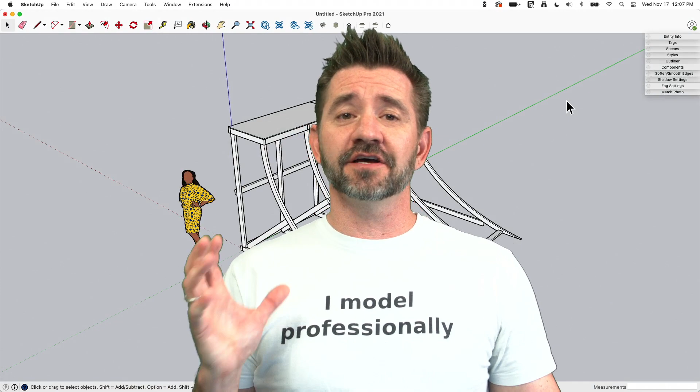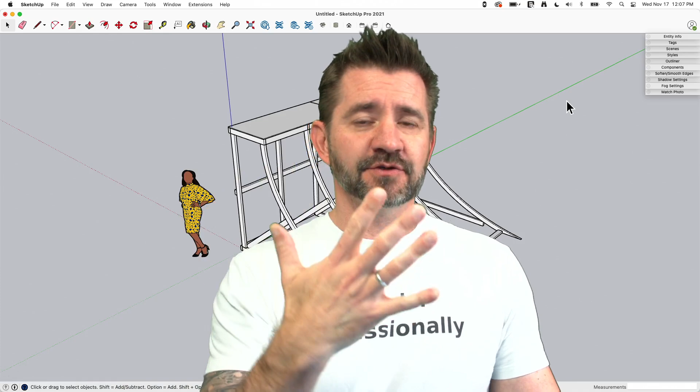Hey guys, it's Aaron, and today I want to talk about the process of drawing bent plywood. I know that sounds very specific, but the general idea is how to best go about the process of taking a sheet of something and drawing it so it wraps around or is bent on another shape. And that's what we're gonna take a look at.

Let's hop in. Okay, so I have here a quick mock-up. Maybe I'm working on a skate ramp, something like that.

Please don't spend time in the comments telling me about my ramp design skills. This is a quick example of the kind of thing that we could use this on. This is not necessarily the ideal design for a ramp. That's not what I want to talk about. Though I am talking about it, I apologize.

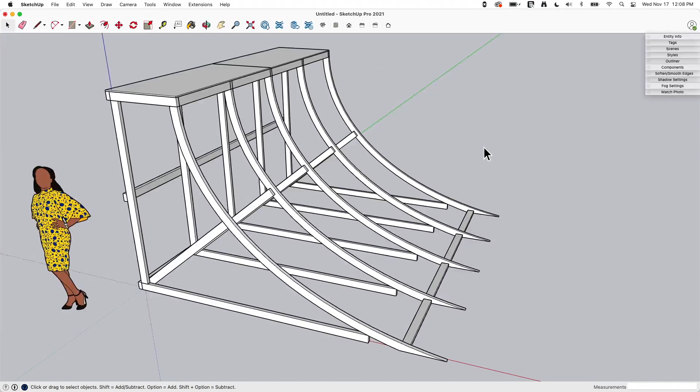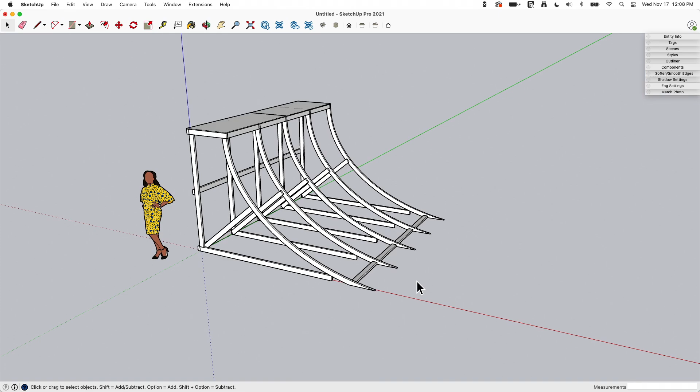Let's hop in and talk about it. Maybe I get to the point where I want to see what this looks like with my sheathing on here. And again, this is a ramp because it's a nice, tight little image that fits on the screen. This could be something like a barrel vault ceiling. This could be something like a rounded window box. Anytime you have a surface that's not straight that you want to drop sheathing onto, that's what we're talking about.

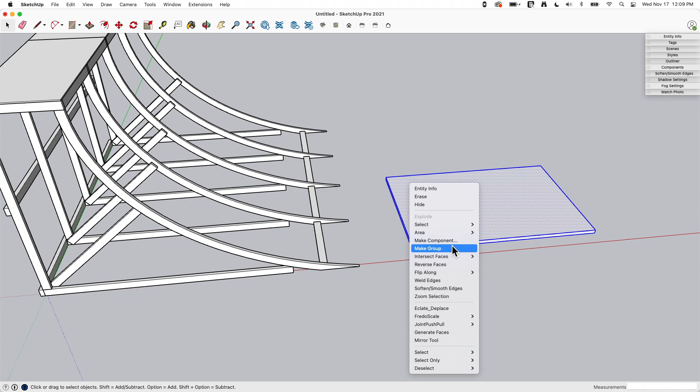So there's a couple things I've seen that I just want to mention. One is to come in and draw the shape. So draw your shape of your plywood, give it its thickness, grab all of that, make it a group, and then use something like the True Bend extension from ThomThom or Fredo Scale and use the bending tool. That is good if you're bending to an exact amount. If I know that I'm going to bend exactly, True Bend is great.

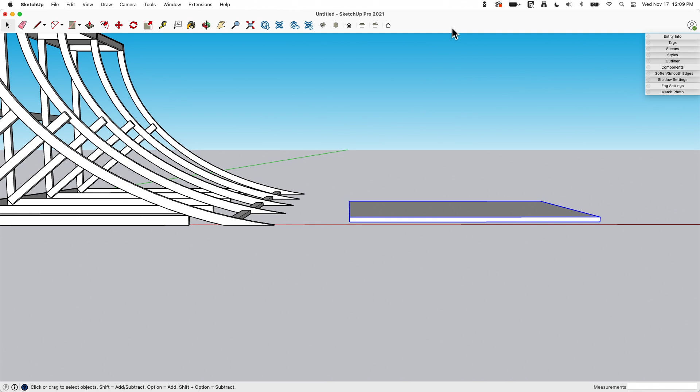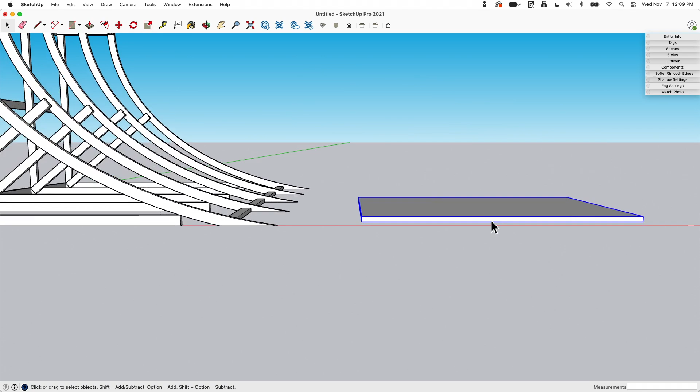It bends towards a full circle. So True Bend will take one end and wrap it all the way around so it meets the other end if I do 360 degrees. So if I'm doing half a circle with this, that's great. That works. Fredo Scale is nice because you can actually grab different segments along there and say I only bend this half of it. But with both of those, you are maybe not going to have an easy time bending to exact geometry. Fredo Scale, I know you could get a little bit more because you can do a little bit of snapping perhaps, but I want to come in and match this exact arc. This arc, by the way, is kind of odd because it's not actually a perfect arc.

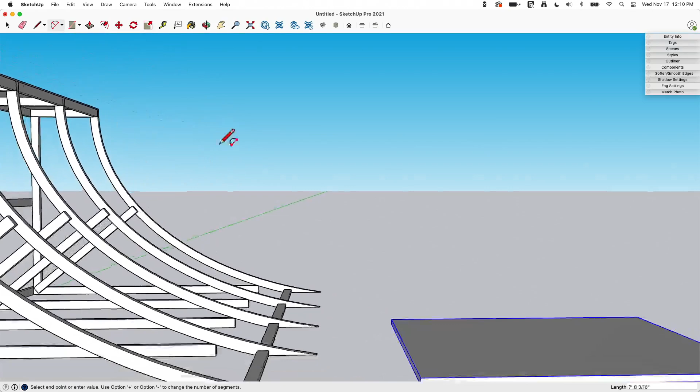If I grab my arc tool and I go from the top down to the bottom and I bring my arc down, there's no spot where this will actually meet correctly. See that? So this arc is actually deformed. This is not a perfect arc from one point to the other. So it makes it difficult to take existing material like this and then bend it to match.

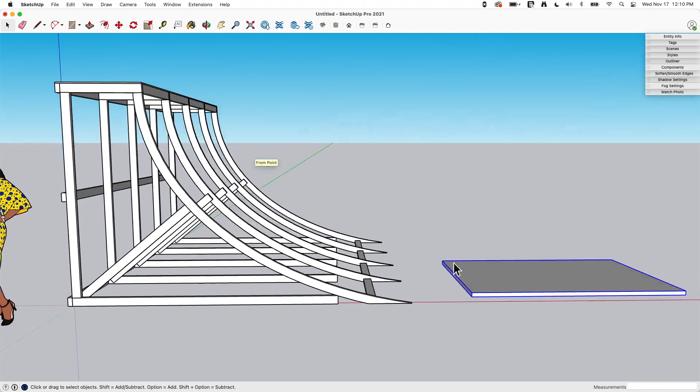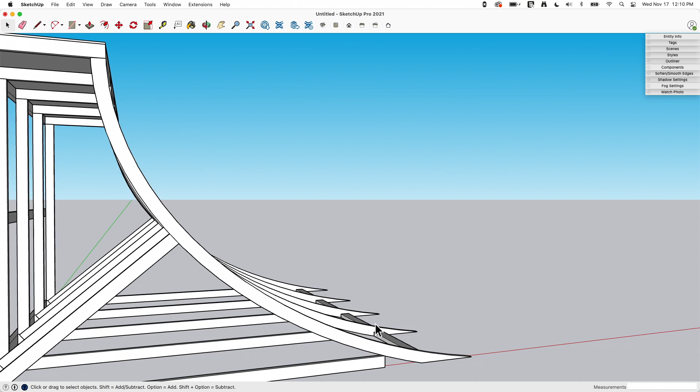What you have to do is think about it in a different direction. Specifically, I want to think about the end of my piece of plywood and then use push-pull to cover the space. So what that means is I want to grab this arc right here and draw the profile of the end of my plywood and then push it across the ramp here. So we are going to dismiss ideas like material sizes and that kind of thing. I just want to get one big piece of material to cover this whole thing and I want to see what that looks like. That's what we're going to do.

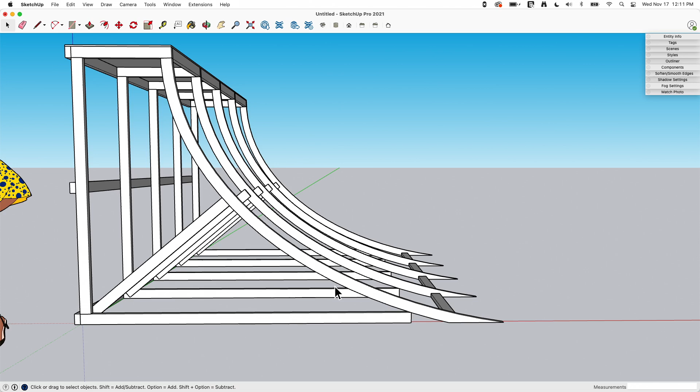So to do that, we need to grab this arc. Like I said, I can't just simply draw it. I could potentially come in with something like a Bezier tool and grab the two and then try, as best I can, to line it up. But regardless of how I do that, I'm probably not going to get the exact same increments in the exact same spot to get the perfect arc.

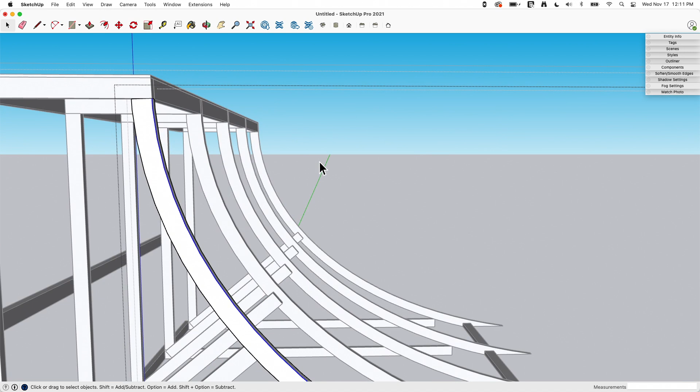Fortunately, what I can do is come into this geometry, so burrow in here, and grab this line right here. I can take that line, say Command C to copy it, and I'm going to come all the way back out and say Edit, Paste in Place. That's going to drop that arc right on top where it is already.

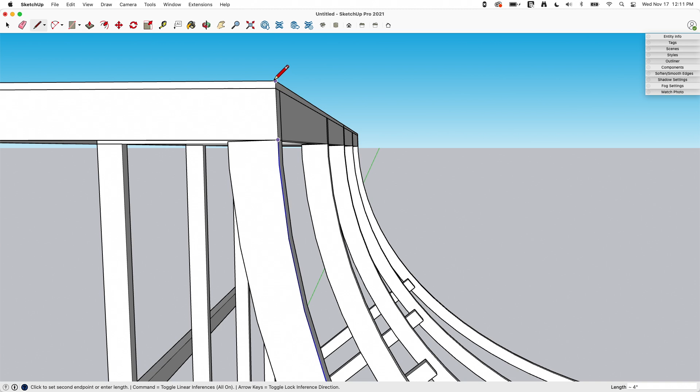Now, I'm not done because that arc goes to here, and then I want this plywood to go all the way up to the top here, so I'm going to add another line from this point up to here. And you can see, did you see how it snapped off there? It's not quite vertical, so I'm going to have it go all the way to there.

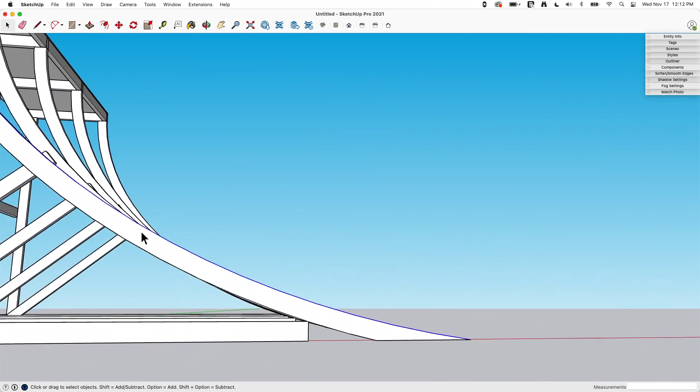Now what I'm going to do is grab that line I just drew and the arc I just copied, right-click, and weld them together. That gives me one line that goes from the top of this plywood all the way down to the ground over here. Now, to get the thickness of the plywood, all I have to do is use my offset tool. I grab offset, I click on this line, and I'm going to pull it in this direction.

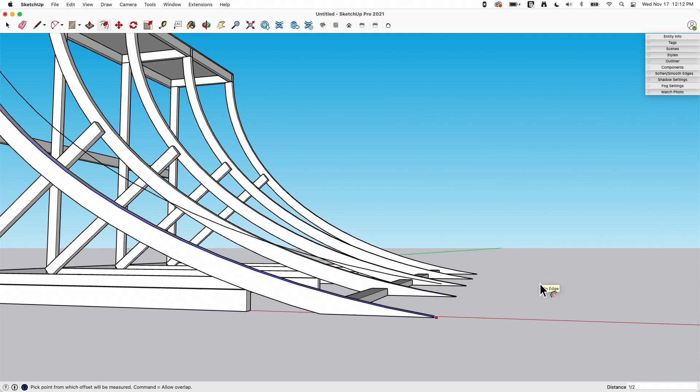Now, the thickness that I pull it in is the thickness of my material. So I said we weren't going to get too hung up on material, but I'm going to say something like, I'm going to bring in a 1/2 inch. I know 1/2 inch plywood doesn't bend that well, but it's visual, so I can see it easy.

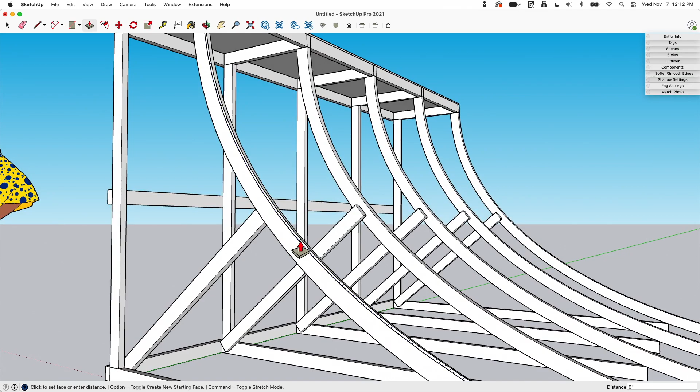Now, I can take this end and connect them together. And then this end to this end, and that gives me a surface. From here on, it's pretty simple because all I have to do is push-pull, grab that surface, and I can pull that all the way across.

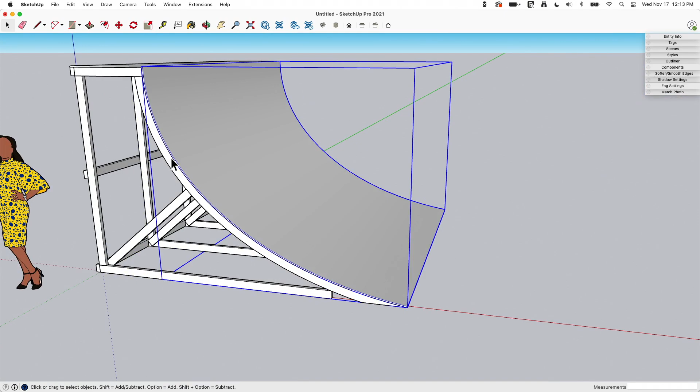If I wanted to do this in smaller pieces, I could pull to the center of this thing right here and then have 2 of them, but you can see that I pull that all the way across like that, and then make that a group. And now I've got my bent plywood. So it's a different way to think about it. Think about the profile that's being stretched across rather than this flat piece that's being pulled across here.

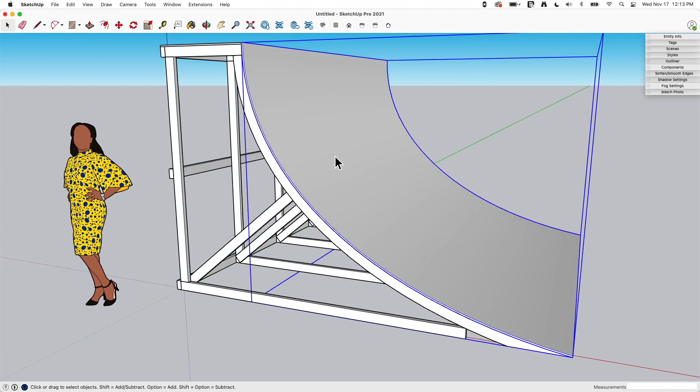Now, like I said, we were ignoring material usage or anything like that. When you do start thinking about that, sooner or later you're going to have to think about if this is going to get built and is not just a pretty picture. You will have to think about material size that you can get a hold of. What you're going to want to keep an eye on is this arc here. This is the outside arc. This is the bigger of the 2 arcs. If you look at entity info, it'll tell you how big that is.

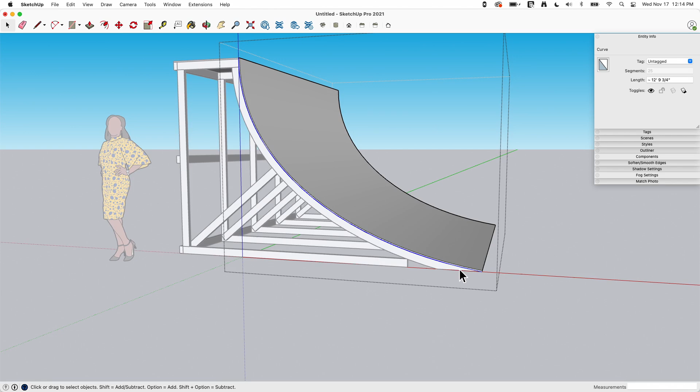So if I wanted to build this as one continuous piece, I would have to find a piece of material that is like 12 foot 10, almost 13 feet long in order to cover this whole arc. If you look at the inside arc, it's going to be just slightly smaller, not by a whole lot, but a little bit smaller than the outside arc. So if you are keeping an eye on material, that outside arc is what you would want to keep an eye on.

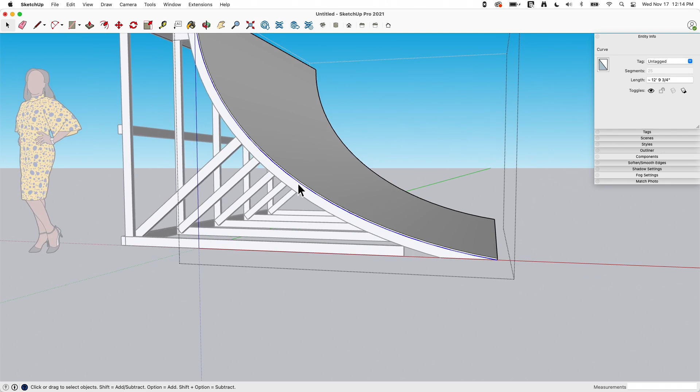And if I had to break this at a certain length because I could only get 8-foot material, you'd want to, as you're putting in that length, cut it so that it is less than that 8 foot when you're doing the first arc. We'll back up a little bit. So if I look at this, if I was to break it like right here, I'm gonna experiment a little bit. So let's say we do that. What length is that arc right there?

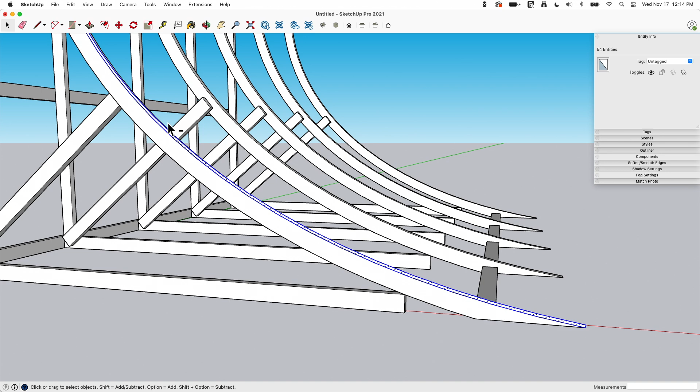Oops, I broke it too much. It broke all my lines. Fortunately, easy enough to get together because I can just triple click, disconnect that. There we go. And then when I select those lines, I can re-weld them. Sometimes when you break an arc, it does break, and I can see that 7'2", so that gives me an under 8-foot piece.

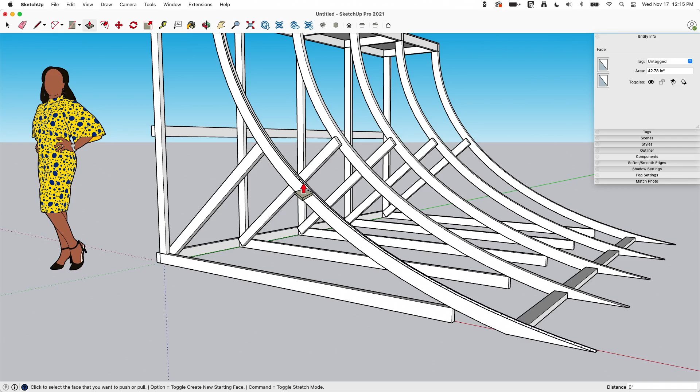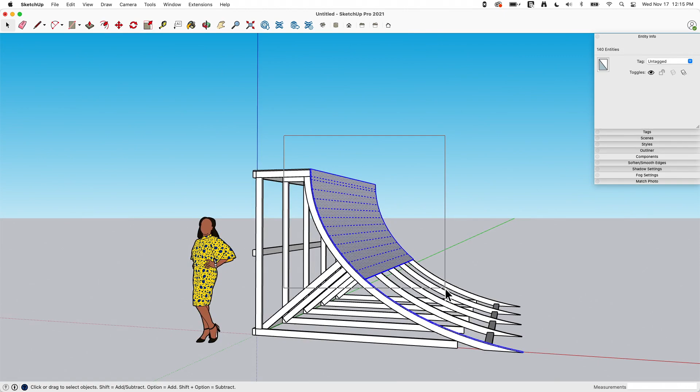This piece up here is 5'8", so then in theory, what I could do is take one piece across like this. There we go. And then that could be one piece right there. Make that into a group. And then my other piece, which is less than 8 feet. Granted, I know now I'm pulling it across here 12 feet anyhow, but then that could be my second piece. And both those would then be under my material length that I have there.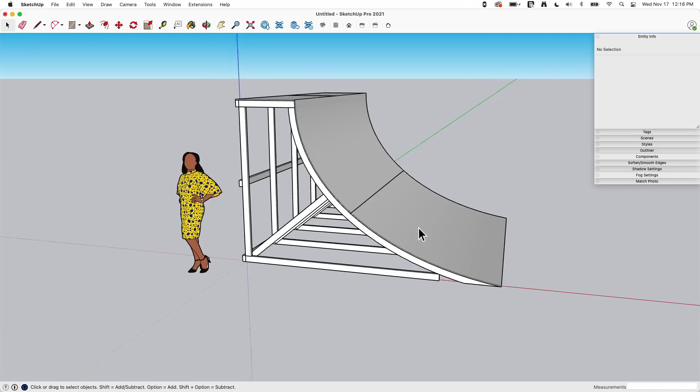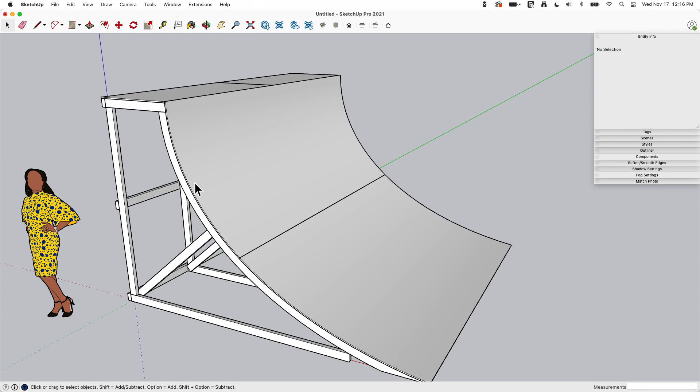So there you go. It's not a difficult process. You do have to think about it differently. Like I said, we're thinking about the end profile pulled across rather than taking a flat sheet and bending like you would in the real world. Just one of the cases where the quickest and easiest way to design is not the way you build in the real world. But that will get you that bent plywood around your shape by using a welded edge rather than trying to bend the shape to the geometry you're meeting.

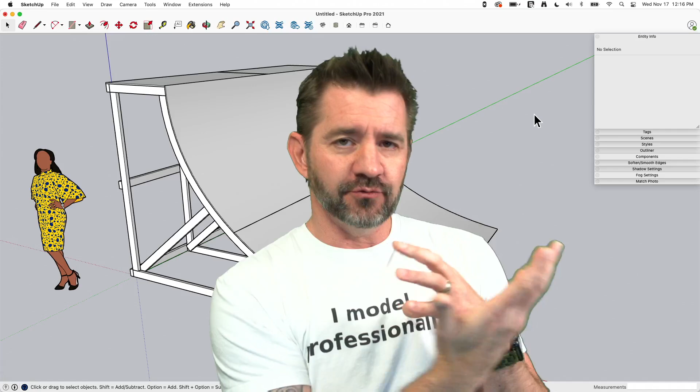So again, probably not a whole lot of people going, well, maybe you are building ramps. And if so, it's probably a little sturdier than the thing I whipped up real quick to show that arc on. But if you do have to create that geometry wrapping around, it is much easier to create the end profile and push-pull it, rather than try to wrap something around something else inside of SketchUp. It is possible to do, absolutely. Want to tell me stories where you've done that? Let's hear it. But creating that profile at the end and push-pulling is going to be a much quicker process and likely more accurate to match the geometry you're wrapping around.